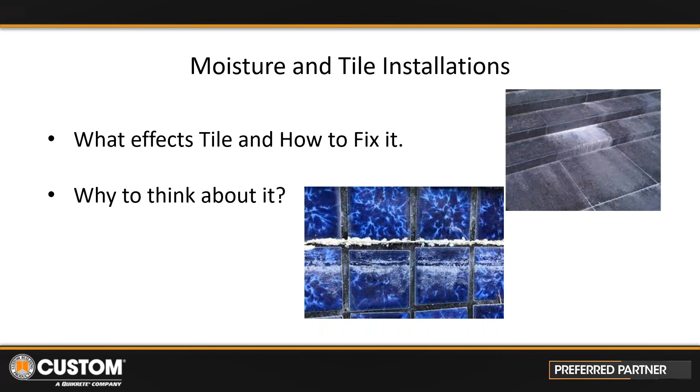I always like to show how bad it can be. I've only got a couple slides on that. You guys have all seen this. You get the push-ups, the shadowing that starts to come through the grout joints, shading out. It's moisture that's trying to acclimate with the building, and it's pushing up through, and it's creating the path of least resistance, which usually is your grout joint, which makes a bad look. It can affect the grouts if you have a high salt content, can eat it. So it goes from there.

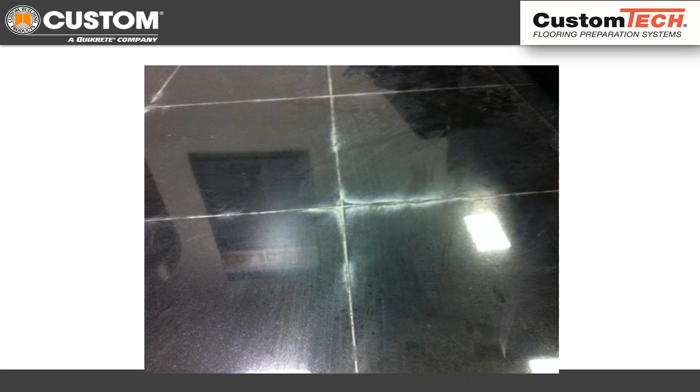If you have some of your conglomerates and some of your other type of epoxy tiles or synthetics, you can actually start to get moisture that will affect even the color and change it. We all know about the old moisture sensitive green marbles that would warp and cup. Now even these epoxy resin backed tiles, if there's a high moisture content there, they can start to curl or they don't bond well. So it's things to think about when you're on site, prepping and getting ready to install your tile.

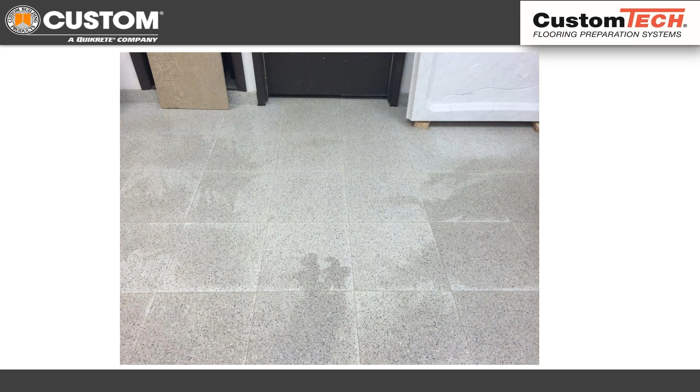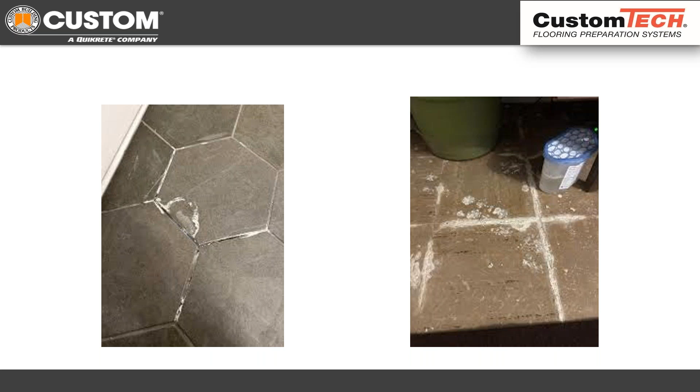Two that I've seen that are just amazing on what can push through a slab, and it just creates issues for all of us. At the end of the day, we've got to figure out ways to stop it, but also how to fix it. I threw this one in here for guys on the resilient side on how bad it can actually get with resilient, because it's truly trapping it underneath.

You get everything from the salts coming up through, to the moisture, the re-emulsification of adhesives, mold, mildew, all that good stuff. It's incredible what just moisture can do with the concrete and with the floor finishes. But it's not just moisture, it's also, like I said, the salts and the different materials that are coming up through the slab.

Common causes for moisture issues: new construction and fast track projects. That seems to be when we're in new construction phase. We come onto a job site, usually concrete's only about maybe 90 days old. It could be 50 days old, 60 days old, depends. Sometimes you get on a slab that may be 6 months old. But the thing to think about is a lot of times when we're on the job sites, the buildings aren't acclimated, especially for new construction.

When we come in, you have green concrete, could be a hot day, could have rained one day, and next thing you know, the slab's re-wet, which now concrete's porous. We all know that. It sucks it up like a sponge. Now it's wet again, so it takes in the moisture. With concrete, we always hear 28 days for strength. That's a big key factor for the strength of concrete. We're going to hit its ideal strength of 3,500, 4,000 PSI at 28 days. That number does not equate to our moisture numbers.

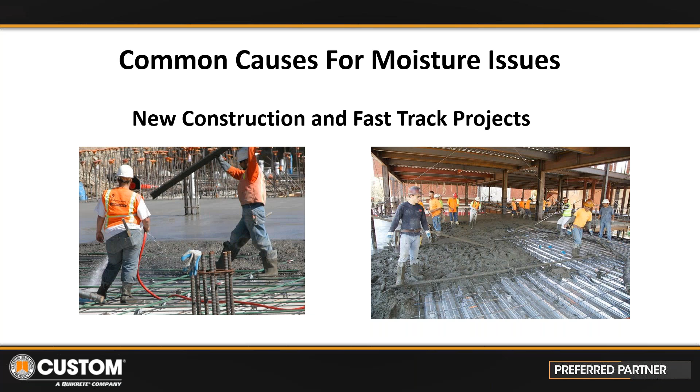This slide here is one of my favorite slides to talk about when we talk about the days. In the first column, we have the water cement ratio for concrete. Then you have your vapor barrier. These numbers that you see where the vapor barrier, vapor retarder is, the blotter course, the no blotter course retarder, those are actual days.

It could take 365 days for concrete to actually dry out with no blotter course or vapor retarder underneath. And that's optimal conditions, no rain hitting on it, none of that kind of stuff that could create any issues. It really comes down to stopping any type of moisture getting to that slab.

That's why when you hear guys testing for resilient with the ASTM F710, a lot of times when you're testing, or even for calcium chloride and RH, the building has to be enclosed. You have to have the air handlers on, drawing in the moisture, getting that room acclimated to what the conditions will be before we install our tile.

As soon as they turn the air handlers on and everything's set, that actually starts as your day one for when that building is starting to dry out. When you come in and do your probe tests, you'll see you're going to be high, and then next thing you know, it will acclimate. With moisture vapor, it's drawing the moisture out because it wants to find an equilibrium inside the room, from ceiling to floor.

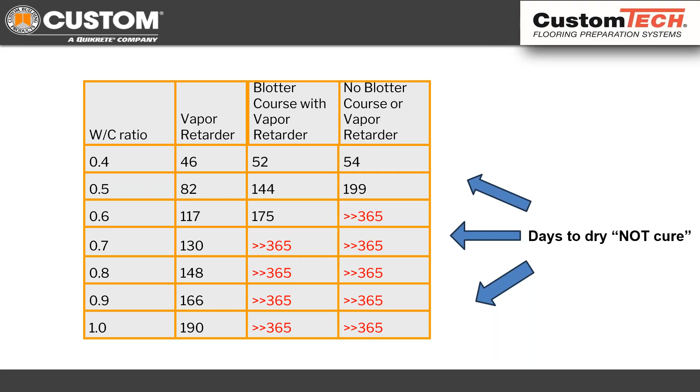Other common causes for moisture issues: renovations and outside sources. These are things to think about when you're coming into a building, especially with renovation. The building has had no issues with any kind of moisture in the past, we're good to go. Building's 15 years old. Well, now you're putting in trenches, or guys are moving old plumbing, or different construction trades are coming in and taking care of things that need to be done for the new tenants coming into the space.

Especially on grade, when you start cutting into the slab, 9 chances out of 10 you're going to disrupt the vapor barrier. Once you break that vapor barrier, there's no way to stop moisture vapor from coming up unless you try to reattach the vapor barrier properly underneath the concrete and tie it in. It's a whole different process if you're going to attempt it. If not, you're going to have to address it on top of the slab.

Other things that people don't think about that could be creating moisture issues for us are outside sources. I've been on probably at least 50 projects where we've had moisture issues, and it comes from the irrigation systems out there. Usually they're facing the building because someone walks by and it sprays them, so they turn the head. Next thing you know, it's spraying and spraying, finds water, finds the path of least resistance. Now it's in the building.

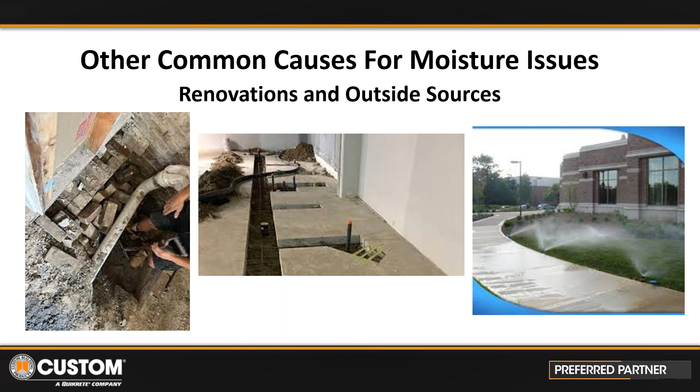So if we find out we do have moisture issues, when we come in, there's two different testing methods that are out there now. We have the ASTM F1869, which is your calcium chloride. That is to my left side. It's the old puck where you grind out your area, make sure it's clean, sound, solid. You weigh out your puck, you put it down, you seal out the box, and then you come back 72 hours, you reweigh it, gives you an idea as far as how many pounds of moisture is actually transferring through the slab and coming out.

There's also the ASTM F2170 RH test. That seems to be the direction a lot of our industry is going, is the probe tests, because it's actually a lot more convenient and easier to use. You can come in, you drill down, you put the probe in 40% the depth of the slab. Now they have the ones where you stick the sleeves in, you come in with your reader, you can put a cap over them, and you can test, and they stay there. So if there ever is an issue, you can come back, pull it in, and say, oh, I'm popping 89, or hey, I'm at 99% RH. You can map it out and see what's there.

Whereas the calcium chloride, that is just a picture in time of the 72 hours that you had tested the slab. It's not giving you an overall reading. You can come back two weeks later, test again, and it could be a different weight. A lot of people don't realize the calcium chloride and RH testing are two totally different tests. They do not correlate in any types of readings. So if someone says, hey, I've got 12 pounds of moisture from my calcium chloride test, it doesn't mean that it's 85% RH. The RH test is reading the relative humidity that's inside the slab, and the calcium chloride is actually reading what's coming through the slab and actually particulating up into the air.

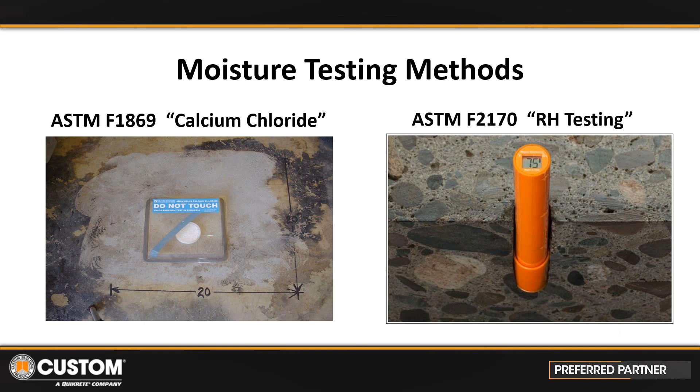So calcium chloride, if you had a 100,000 square foot job you were testing, that's a whole lot of pucks throughout that slab everywhere. Whereas if you did an RH, you just drill in holes, still the same number, but they're not as obtrusive. Guys don't kick them around. Guys don't play hockey with them, because they're in the concrete. But it's kind of the two methods that we see for moisture testing. There are other types of meters and stuff. Most of it is more just to qualify to see if there could be moisture there, but these are the two main tests that you would see within your ANSI standards and your ASTM standards.

Your ASTM standard for moisture mitigation and for fixing any kind of area is a designation of F3010. That is the standard if you guys need it. I know that we have copies of these for people as well. It really spells out the process of what you need to do, what's covered in the ASTM F3010.

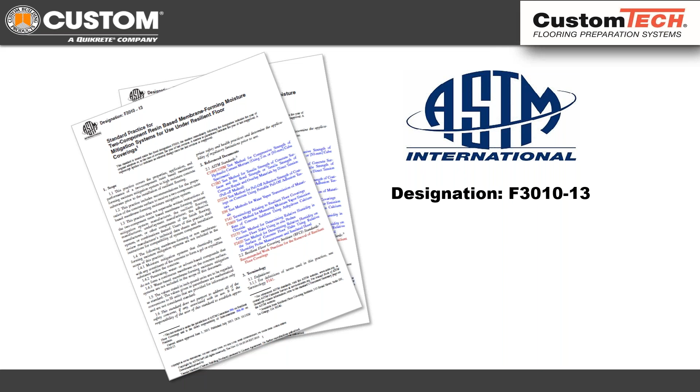So when you do have a problem, and you have to figure out what you're going to do about the problem, to me, you always want to look for a reputable moisture mitigation system. And when I say reputable, you're looking for one that's definitely designated F3010. It should be in their tech data sheet. It should be labeled on all of their packaging, stating we do qualify. We're a two-part epoxy system. We hit all of the requirements that are there. Definitely make sure it is 100% solids.

You also want to make sure that it hits the right pounds for the calcium chloride, the ASTM F1869. Most of these systems are hitting the maximum levels, which is 25 pounds, and then 100% RH, which is your F2170. So you just want to make sure it's always up. pH resistant, of course. We all know if you have moisture, there's probably some sort of salt pushing through. We need to be able to take care of any high pH that's there.

Pigmented for application. A lot of people don't realize when you have these two-part epoxies, if they're not pigmented and they're clear, as you're spreading them out to the proper mil thickness and requirements by the manufacturer, sometimes you can't see where you start and you stop. So you want to make sure that it's pigmented. Most manufacturers are pigmenting them now, so you can see where you start, where you stop, and go from there.

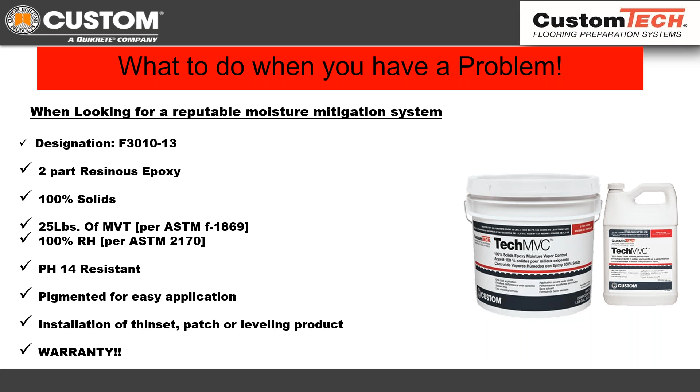The other thing too is most of the manufacturers have good reps that are out there. Reach out to myself or the local territory manager you have. Be glad to come out and talk you through the different processes and show you, hey, this is what we need to do, we have this issue here, and help out. But these are just some bullet points to think about if you have a problem.

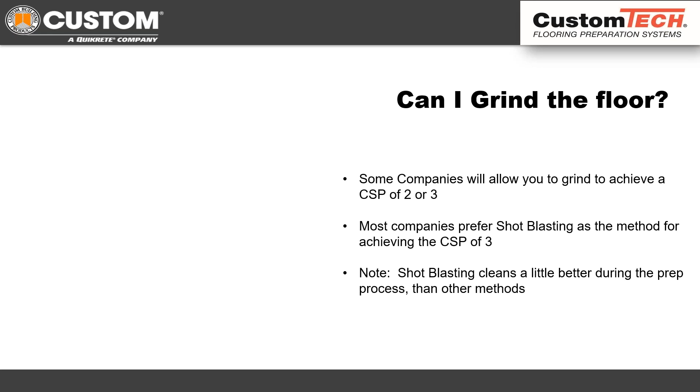Common questions that pop up when we talk about moisture mitigation. Can I grind the floor? With a two-part epoxy, most manufacturers will follow the epoxy industry standards and require a CSP of 2 or 3. A CSP, if you don't know, is a concrete surface profile. To give you an idea of what a 2 or 3 looks like, if you see a plain CMU or concrete block wall with no paint on it, that texture is very close to a 2 or a 3. So they're not asking you to come in and completely destroy a floor and make it look like the moon. We're just trying to clean the floor and give a nice surface profile so that we get a good mechanical and chemical bond to the substrate.

But when it comes to grinding, some companies will allow you to grind to achieve a CSP 2 or 3, because there are machines out there with scabblers and different heads they can put on the machines that can achieve it. I always just reach out to the manufacturer and ask. But most companies will actually prefer shot blasting. The method is easy. It achieves CSP 2 or 3.

Should have actually put a picture of a shot blaster and I didn't, but it's a machine you walk behind. It's got a vacuum connected to it with HEPA filters. It legitimately shoots metal shot balls down to the ground, and with a vacuum and a magnet it sucks them back up. It really gives you a nice clean floor, especially for putting down any type of mitigation system or even self-leveling, patching, or thin set.

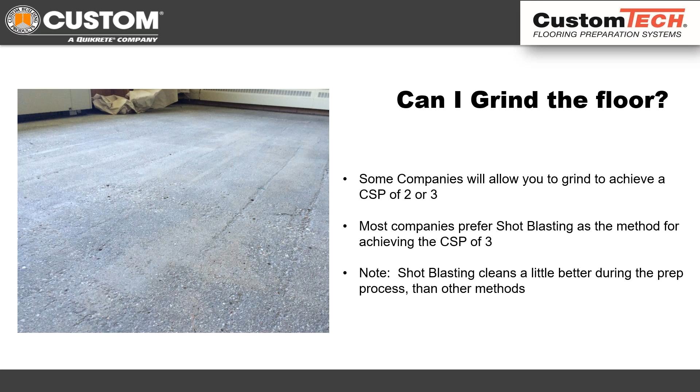Just gives you that nice area. The picture you have here where you see the corn rows, that is from a shot blaster that came through and cleaned it up. The biggest note that I always like to explain when you're doing the mitigation shot blasting, it's definitely a cleaner prep process, I believe, than a guy coming in with a grinder. Less dust, it's a little bit easier method.

Too far. Should I mitigate repairs in the slab? Quick answer to that is if there's any concern for your tile or finish assembly that could be impacted by moisture, I would absolutely mitigate the trenches and the repairs that come through. It's a quick, easy fix with the mitigation. We're not asking you to mitigate over the entire area. A lot of times we're only asking you to go 6 to 12 inches on each side of the trench that's cut through, just to take care of that green concrete that's put down so you don't have any moisture issues that come through.

When you come into an area, if a guy's doing trenches, little tips and tricks, you can ask them just to do a quick broom finish across it or not steel trowel finish the area, especially if you're going to mitigate, because then you don't have to worry about doing a surface profile because you'll achieve it by doing the repairs with a broom or a trowel.

The other thing too with these repairs that I try to explain to people is when we talk about moisture vapor, we're not talking about true water. We're talking about a particulate. It only moves north and south. It doesn't move east and west. That's why you can actually address just these areas. What happens is it comes up, it hits straight up, it hits the moisture mitigation system, which is slowing down the perm rate of the moisture coming through, and it allows for it to be sustainable for the floor covering that's there.

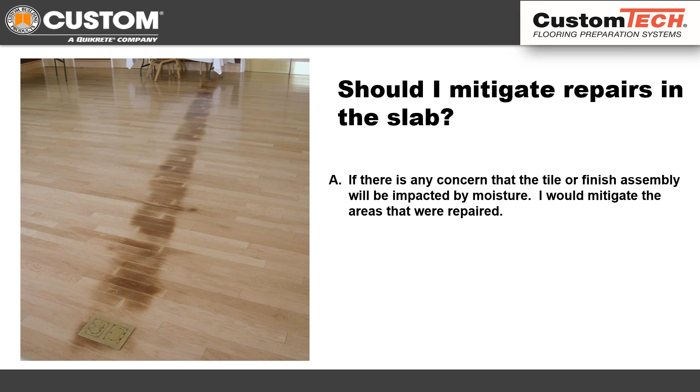Big question that comes up with moisture mitigation is, can we fix hydrostatic pressure problems? Absolutely not. When you have water that's above your floor, and the wall's holding it back or something's holding it back, these mitigation systems will hold it back for a little bit, but eventually they'll fail. So any type of hydrostatic stuff, every manufacturer is going to say we can't stop hydrostatic pressure.

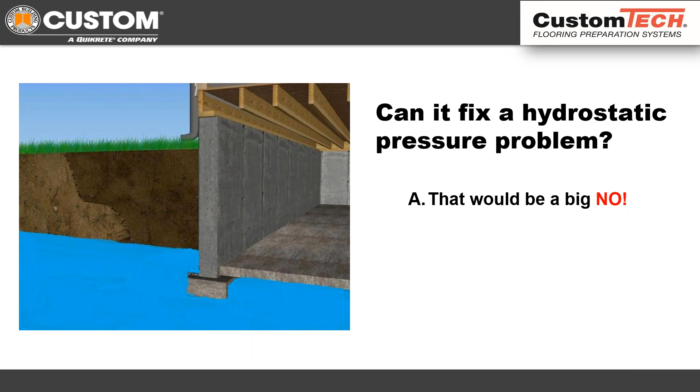So that was kind of the quick overview on moisture with tile. The big thing that I just want you guys to understand is just keep your eyes and ears open when you're on a job site thinking, okay, I'm coming in, I'm setting this tile, could I have any issues with my grout? Could we have any efflorescence pushing through salts that will make the finish look not pleasing to the owner? Just keep your eyes and ears open on that kind of stuff. And if there's ever any questions that come up, reach out, and there's always a way to help you guys come up with a solution to fix the problem.

Moving on to some of the other things we talked about, types of substrates for installation of tile. You guys know gypsum and concrete pretty much. Some guys might know plywood, but I just want to go over some of the little tips and tricks and give you kind of an overview of why tile guys might want to start looking at self-leveling over wood versus other types of applications.

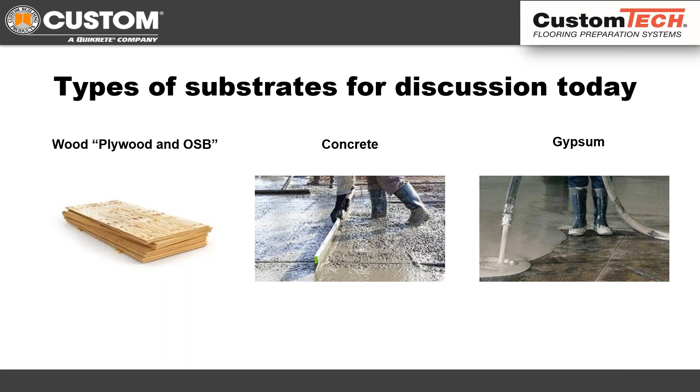So one of the ways to prep over plywood or OSB is to use the old method with the metal lath. A lot of people have never tried self-leveling over wood with metal lath. I will tell you it's taxing, and if you don't wear gloves, it will tear your hands apart. It can be a mess.

So, just standard steps: you walk into the area, secure and inspect your plywood, make sure it's down tight. If there's anything that's loose, tear it out, put it back in, clean, sound, solid. Clean the surface, of course. You want to sweep, vacuum, remove any dust, oils, anything that could be a bond breaker. You're going to prime the plywood. When it comes to primers, we'll talk about them in a little bit, but always use the manufacturer's approved primer for that substrate you're on.

Because you're going to find some manufacturers have 3 or 4 different primers that do 3 or 4 different things. You'll find some that have one primer that takes care of everything. That's the way that we're handling it with Custom Tech: we have one primer that's universal. It does porous and non-porous, goes over pretty much every substrate you can imagine. Just make sure you're using the right primer.

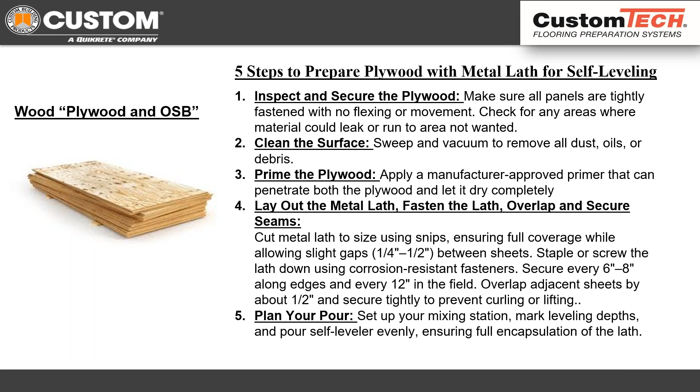New ways that people are starting to come out is we're removing the lath. So we're coming up with products. One we have, it's called WSF Wood Subfloor. No lath needed. Same principle for our prep, guys, is you're going to come in, you're going to inspect the floor, make sure everything is clean, sound, solid. If there's anything that's loose or whatnot, you take it out, you put it back in, you make sure it's down and really, really locked in.

Clean the surface, of course. I always tell people, fill your gaps in your seams, make sure there's no penetrations where you could get some leakers that could come down through with a self-leveling material. Now from there, as you see, we're not putting lath in. So now we're able to apply our primer. Once that's completely dry, then we can come in and pour. So we're saving that whole step of coming in and setting wire, either nailing it down, stapling it down.

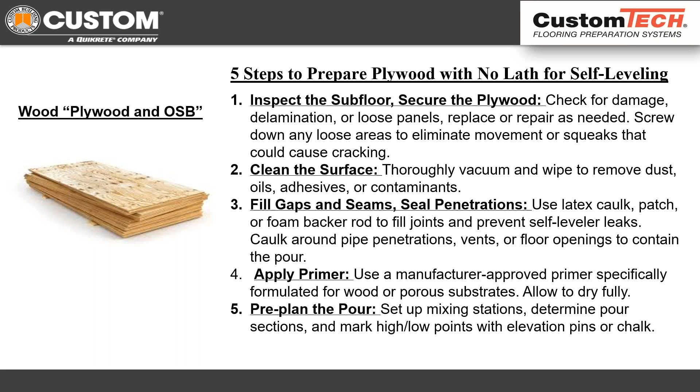Really, it gives you a whole different dynamic for coming in over wood, especially with the new products that are out nowadays, where they're more flexible, where they have better adhesion to the plywood, to the substrates. So there's different things to look for. But like I said, for us, we have WSF that will bond to pretty much anything. It is 100% a cementitious, calcium aluminate self-leveling material. It is not a hybrid. It's not a gypsum leveler. It is a cement-based leveler.

One of the benefits that I would like to talk through with the tile guys, and architects and whoever else is listening, is self-leveling over plywood. Some of the old methods were using Hardie backer board or cement board, or guys were even using thin sets and building up with thin sets to try to hit certain levels and stuff like that.

Self-leveling, when you really start to dive into it, is going to create a nice flat smooth surface, which will help as far as laying out your substrate, setting up your tile and everything else. It also helps as far as the bond of your thin set. Now you're bonding to another cement-based product, so cement to cement loves each other, so you're going to have a nice bond and adhesion.

Speed of installation: most floors, especially wood, they undulate, they're up and down. If you self level and you get your floor flat, you'll eliminate a lot of the undulation that's in there. Now you're not having to shim or to float. You're not having to use spacers to shim out. It works really well on that. It saves labor and time.

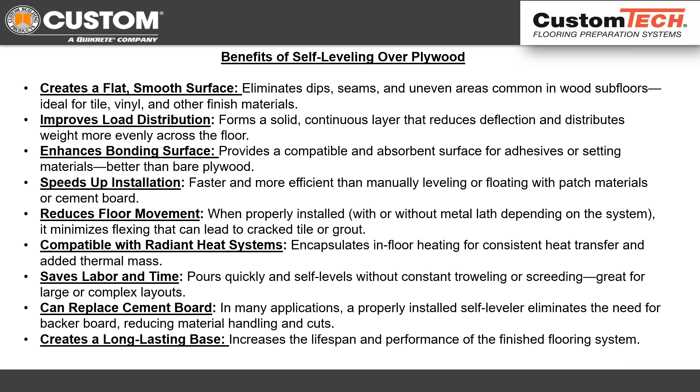Prepping for concrete. We get into concrete, guys, you're always going to want to inspect the slab you're walking into. You're checking for contaminations, you're checking for laitance, you're checking for any types of paints, anything that could be a bond breaker.

Some manufacturers will ask you to mechanically profile the concrete. Once again, they'll ask you to shot blast, they'll ask you to scarify, whatever, to get that CSP of 2 or 3. I always say avoid using any acid etching. There are some guys out there that will try to go in and use muriatic acid to pit and create some nice spalls in the slab, thinking they've got themselves a nice profile.

But the problem is concrete's porous. It's going to suck that acid etch in, and once it's in, it's always going to want to come back up to the top, just like oil, and it's going to eat whatever you put down on top of it, so you always have an issue. So for this, just follow the manufacturer's recommendations.

For us with the Custom Tech products, we don't require a surface profile. We just follow clean, sound, and solid. So if your floor is clean, sound, and solid, no surface profile needed. And common sense does come into play. If you've got overspray of paint, or something down that needs to be removed, unfortunately, you have to take it off. You're only as good as what you bond to when it comes to your self-leveling materials.

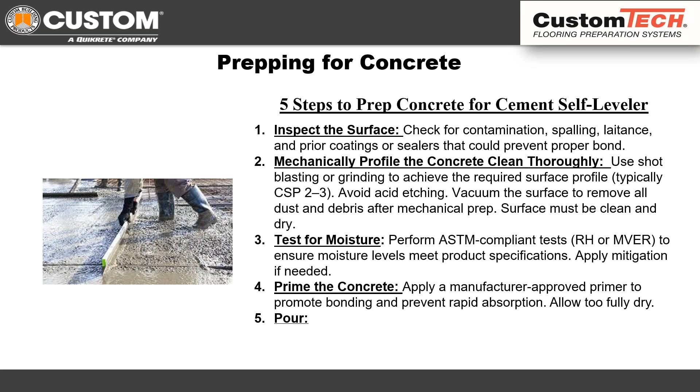Gypsum. So this can be a fun topic to discuss. I have some contractors that are always saying, we don't self-level over gyp, gyp to gyp type deal. With the technology and enhancements of materials nowadays, we can self-level over top of gypsum. So the best thing to do, once again, is check through, make sure the gypsum's not soft. Any areas that are loose material or jacked up, we're going to have to take out.

Test for surface strength. Some guys will do the scratch test. Some guys will do a true bonded test. They'll run the system and do a pull test to see what the PSI is. Most manufacturers are going to want the gypsum to be over 2,000 PSI before installing on top of. Is it being tested every time on a job site? No. But you can tell if something's punky or not, if it's going to hold up your material.

If you find out your surface is hard, now you're moving on to the next steps. Mechanically abrading the surface and vacuuming thoroughly. A lot of times on these gyp jobs, there's carpet glue stuck to the gypsum, patch that was left from before. You really want to try to scrape it up, clean it up.

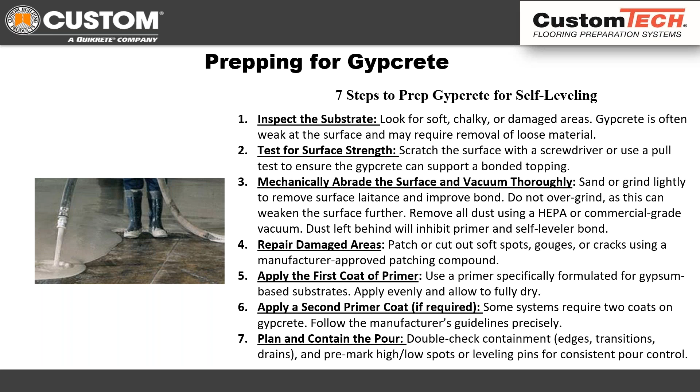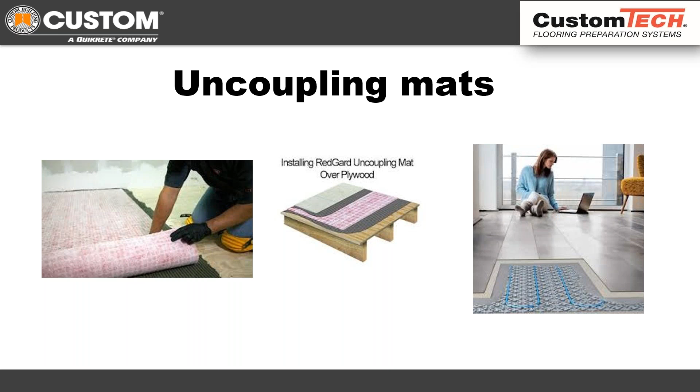The new one that people are starting to get into with self-leveling is guys are actually starting to self-level over uncoupling mats, and also the heat mats that are part of the uncoupling mats. Some guys look at this and they're kind of like, okay, why would I want to self-level over an uncoupling mat? Biggest thing with this is you just want to make sure whatever manufacturer you're using is compatible with the uncoupling mat that you're using. From there, you're going to thin set this down just like you would your normal thin set. Modified thin set, set it, seam it up, roll it.

You're going to let it cure out. Most manufacturers are going to tell you let it sit overnight, come back in. Some manufacturers will tell you to prime over top of the uncoupling mats. Some manufacturers will not. I can tell you we do not. It's kind of a waste of material for us as far as pouring over top of plastic. But some companies, I guess, want to make sure they have a mechanical and chemical bond.

Going to mix up your leveler, pour it in. You're going to get it set to the flatness that you're looking for. Some mats do have a requirement as far as certain thicknesses you have to be above or below, as far as your grooves and your little pock marks. But once you have them set, you go through.

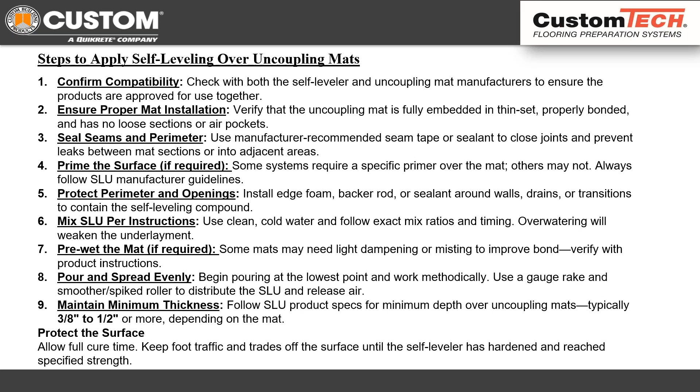Benefits for going over top of uncoupling mats. As I said just before, nice flat surface. It's going to allow you guys to come in and start setting your tile, especially these larger tiles where we all know you have to be an 1/8 in 10. You come in, you pour out, you have a nice flat surface. It makes things easier. It saves time and money.

It supports as far as your floor height adjustments. If you're in there and the room slopes a little bit, or you got a threshold, instead of building up a thin set, you could actually have it pre-leveled and set out. And then you're ready to rock. So it's keeping things going. Reduces the hollow spots, of course, under tile. But then also it enhances your warranty.

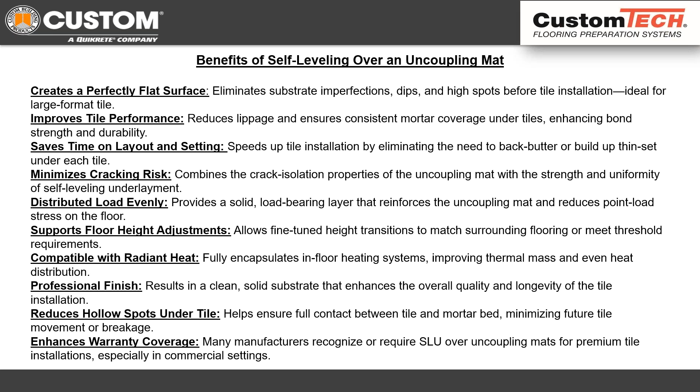There's a lot of manufacturers out there now where, when you pour self-leveling over top, it adds to your installation warranties. Instead of getting a 5-year, 10-year warranty, you might end up qualifying for a 25-year warranty. So it gives you different variables. The big thing with this as well is you're standing up. It's making things easier for you guys.

Primers. Just want to throw a quick little note on some primers here. Primers, guys, for self-leveling materials. A lot of guys are kind of like, don't need them. Should I have them? Always use a primer whenever you're self-leveling. It binds the dust in, helps clean it. It suppresses the suction of the substrate.

If you've ever poured a leveler over top of a very porous substrate and it's not primed, you'll lose the life out of your products. You lose the yield, so you're not getting the coverage you're supposed to. Sometimes you'll get drying variances, so you might get some surface defects. You could get some shrinkage cracks, a bunch of different things, just because of a simple little primer that a lot of times you're only waiting an hour to install after. Once it's dry to touch, you're able to install on top. So it makes things easy that way.

But primers, I always tell guys, if you're getting levelers or you're sending a guy to go pick up leveler for you, make sure he comes back with primer. Some companies are okay with using someone else's primer, but I'm not a big fan of it. Just make sure there's a primer down.

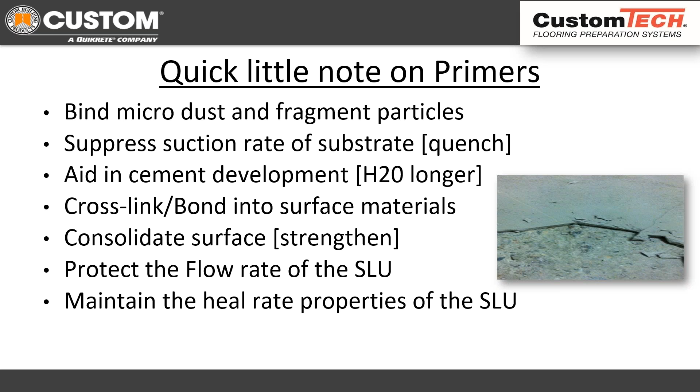Review steps for applications: make sure the substrate's been properly prepared and primed. Big thing is leakers. Make sure we address them for all types of applications. My favorite is the mall story where a guy was self-leveling above an Apple store and did not realize that the penetrations weren't sealed for the plumbing and electrical. And he got a phone call very quickly that the self-leveling material was leaking into the storage room with all of the Mac appliances. It was awesome.

Same thing: mask out and protect yourself. Windows, believe it or not, just like with your tile, can change the conditions of a slab, make it hotter, make it cooler. So always keep that in mind. Air vents and drafts: if you have a building that is acclimated and pumping out cold air, I mean, I'm in Pennsylvania today and it's 103, you might be pouring and next thing you know, you see an area that looks like it's drying faster. It's probably because an air vent's pushing air straight down on top of it.

Mixing stations with dust control. And make sure your workers are trained for each specific job. It becomes an assembly line when guys are pouring. Make sure each guy understands what they got going on, and always have a backup plan. Have a garbage pail, a shovel, an extra drill. You just never know what might go down.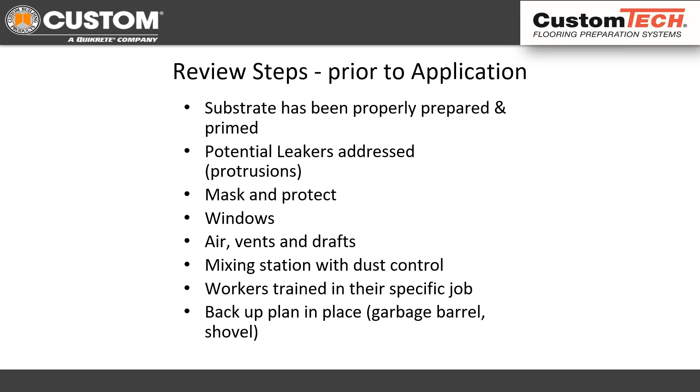Unfortunately, with self-leveling, once you start, a lot of times it's hard to stop, unless you have a nice place where you could change a plane and actually stop. But once you go, you go. So if something goes down, you could have more of an issue later on. Tips for self-leveling as well.

Like today, like I said earlier, it's hot temperatures. I always tell guys, take ice, put it in your water container. Just take the bags of ice and just drop them in there. Keep that water cool. These are all calcium aluminate products. If you have warm water or hot water, they will set up so quickly you won't even be able to work with them. So you want to keep that mixed water as cool as possible.

I know nobody on here will do this, but when I say put the bag of ice in the barrel of water, don't break the bag and dump the ice in. We've actually had guys say I've got issues because it's got lumps and I've got areas and stuff, because they legitimately were mixing ice with the water, with the material. Close windows and doors to prevent air movement. Direct sunlight, as I said before, can always create issues.

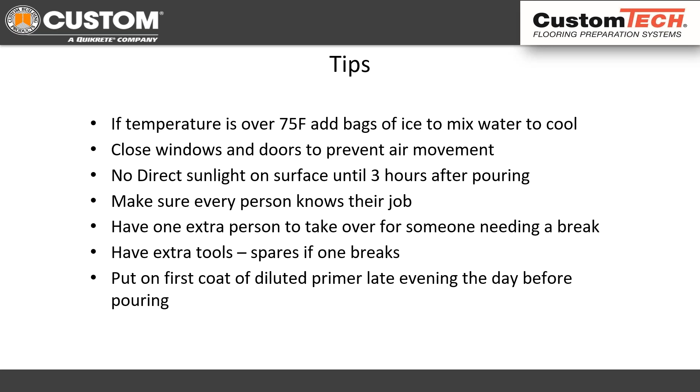Extra tools, and always, if you're pouring, put your first coat of diluted primer on late in the evening, the day before you're going to pour. That's a great one. If you're going to pour tomorrow morning, right before you leave, when all the other construction workers and trades are getting off, go ahead, prime that area, get it set for the next morning. So when you get in there, you can stage your material, get yourself going, and it's one less step you have to do when you get to work.

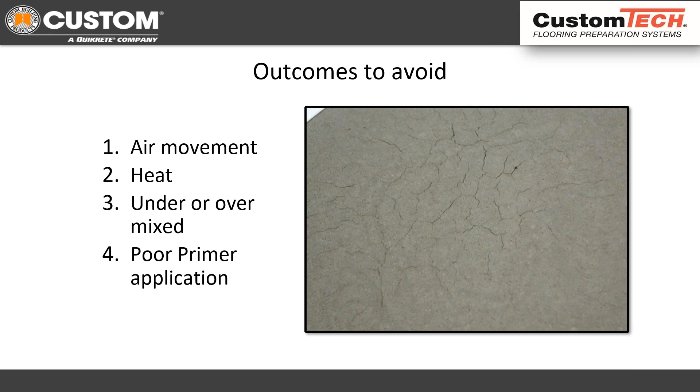Outcomes: air movement, heat, under and over mixing, and poor primer application. These are pretty much standards you can try to avoid, hopefully avoid. The picture you see there is actually from air movement pushing across underneath a doorway that didn't have the weather seal on it. And it actually dried out the surface of the leveler and made it crack like that, almost kind of like a cake top.

I didn't talk about individual self-leveling materials and different products. Custom Tech for us, we have a full line of prep products. When we developed Custom Tech, it was contractor driven, and it still is. You will see with our product line, it's a smaller product line. We have legitimately just a handful of levelers. We have 3 patches, 2 primers, 1 mitigation. That's it. And it's for ease of use.

For us, we know that for most guys, it's 1 or 2 levelers that you need all the time. You need something that's economical, and you need something that's either going to run thin to thick or something to go over top of strange substrate. So for us, we try to keep things simple. Same as other manufacturers, they all have different types of products for different types of installations and setups. So it's something to always take a look at.

I will tell you, not all levelers are equal. There are some that are really, really well established and well made. And then there are some that will sell you the bill of goods that might not be suitable for the application that you're looking to do. Just make sure you get the right product for your installation.

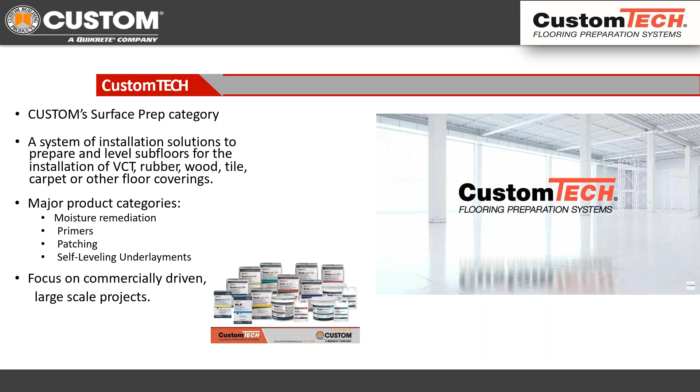Wanted to bring up a couple other things here, guys, and I'll be wrapping up. Methods and standards. The standards for self-leveling have been updated. So we do now have A108.21 for interior installation of flowable hydraulic cement self-leveling underlayment. And then we also have A118.16 flowable cement for self-leveling underlayment. So we do have standards, guys, from ANSI and ASTM for installation methods for hydraulic cement underlayments. And you can find all this stuff in your ceramic installation books.

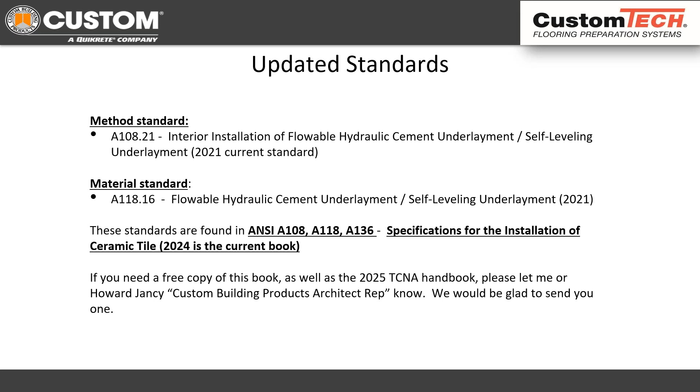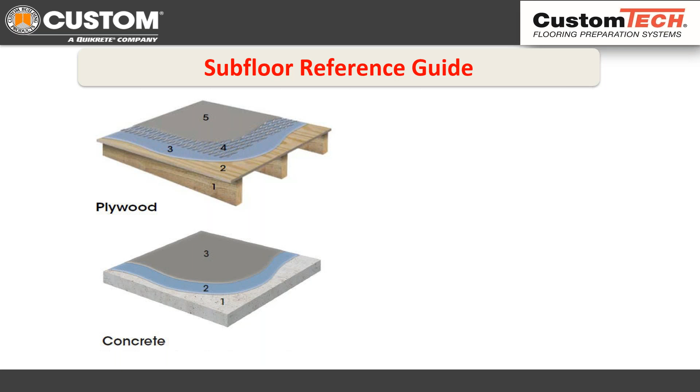Other things too, there are reference guides out there for how you want to do these installations that break things down for you. The top one there, the wood, which is the old method: primer, and then your lath and your leveler, and going from there. So there are different references to help you guys learn more about the actual practicality of the installations. In there, and there, and there.